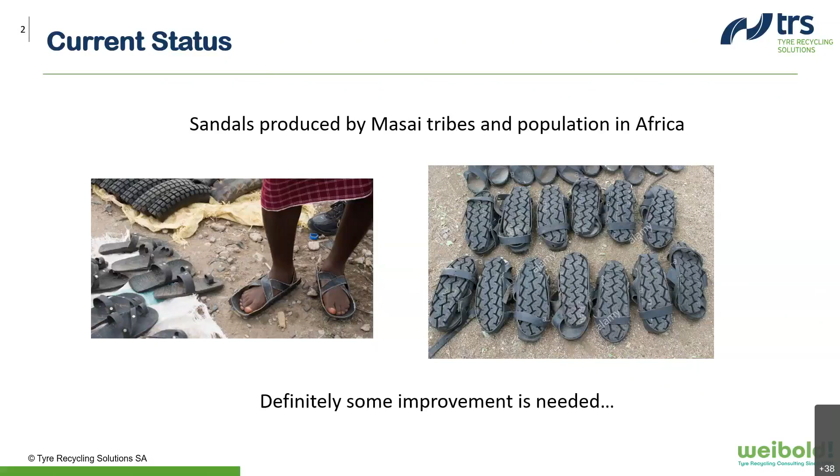It's somehow a provocation here. These are sandals that are produced by the Masai tribes and population in East Africa mainly. Somehow funny, but it's a good kickoff for this webinar, which is actually focused on how to evolve from this, with a presentation of processes and scale up and technology to go to an industrial scale. Next slide, number 3.

The main topics of the webinar. I will start from the tagline and be precise and accurate on this. We want to understand how to formulate our TyreXol CW rubber powder, maximizing its use, and make out of it sustainable shoe soles. CW stands for car water jet. We divided the presentation in three blocks of topics. The first block will be the introduction of TRS, the company and technology, and TyreXol rubber powder, the background for these trends and the rationale for using TyreXol in footwear.

The second block will be a bit more technical, involving the presentation of our results in rubber, in polyurethanes, and thermoplastics, with a case study on 3D printing. And the last block will cover cost aspects and EH&S aspects that are really important for the manufacturing of footwear.

With, at the end, our conclusions. To be said that a lot of work has been done at TRS, but also in other companies, on tires and how to recycle rubber powder on tires. But footwear is the second largest market for rubbers after tires. So we want to really incentivize the use of recycled rubber into the footwear segment.

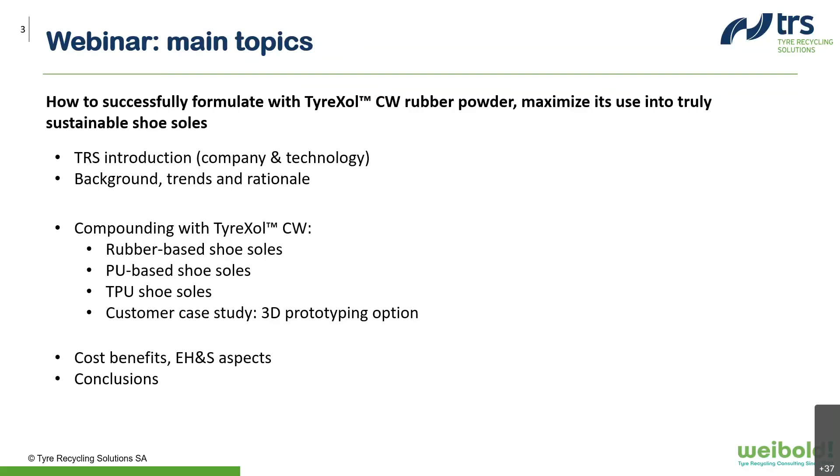Next slide, number 4. It's on the assets and the locations of TRS. From the pictures, well, our building, our plant with solar panels providing energy, brand new. A detail of the inside is part of our post-treatment plant after the water jet. The stock in and the stock out. Stock in are incoming end-of-life car tires mainly. Stock out are big bags of the powder we produce.

A remark on the logo. We are, since December last year, certified ISO 9001. It's a standard for the industry segment where TRS is planning to operate. Then the map showing Switzerland, where we are. The plant is located in the area of Neuchâtel Lake, while the R&D and administrative office are closer to Lausanne, on the Lake of Geneva, on Lake Leman.

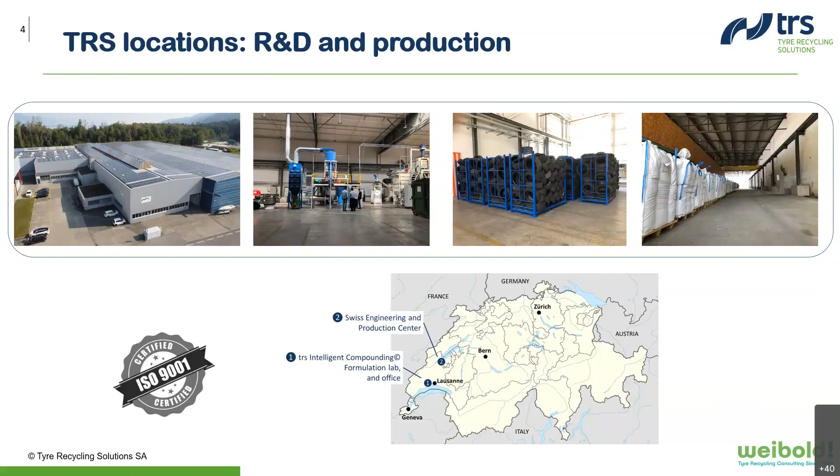Next slide, number 5. We present here the business model of TRS, which is key for this webinar and the evolution of the implementation of TyreXol into applications like footwear. First of all, the production, the assets. We have our own plants that we've been showing, plus the hubs. We have already a plant starting in China this year, and the next on-stream licensed plants will be in Eastern Europe and in the Middle East starting next year.

After that, the role of TRS, not just selling the equipment, but acting as licensor and interacting with off-takers. We have an off-take agreement with our partners. We take care of the production process that should be conforming to strict quality standards. The plan is to implement the ISO certification in all plants. And the idea is to go always in the direction of customers, meeting their requirements locally.

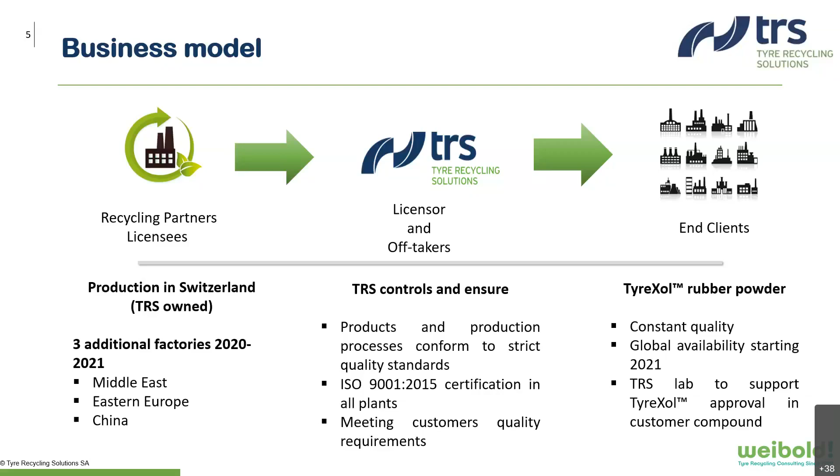The third step in the business model is the rubber powder itself. We aim to have a constant quality everywhere with a global availability provided by the geographical position of our plants starting next year. On top of this global reach, the centrality of the TRS lab and headquarters in terms of competences and technical support for the quality of the powder. Next slide, number 6.

A glance on the technologies. We start from scrap tires, mainly from car tires today. We start in the higher part of the screen with the sorting. This stream is for the TyreXol water jet. We call it water pulse. The sorting then foresees the introduction of end-of-life tires in the T-cut. The T-cut is our patented solution to make the tire into 3 flat parts.

The tread is treated with our patented water pulse technology, a specific water jet operating at above 2000 bars, which, after a process of dripping, drying, and sieving, generates a product that we call CW, car water jet, recently also accompanied by the TW, the truck water jet. We are starting to apply this technology also on truck tires.

But then the other stream on the bottom of the screen is concerning the qualities. Out of the fork at the T-cut, we can operate on the residual of the flattened tire that cannot be treated with water jet. We put it together with a mixed feed of other kinds of tires. We then implemented a solution, SGGM technology, shredding, granulation, grinding and micronization, which at the end of the process of sieving leads to a TyreXol quality mechanical mix that can be further treated with a chemical activation to create an MMA grade mechanical mix for asphalt and bitumen applications.

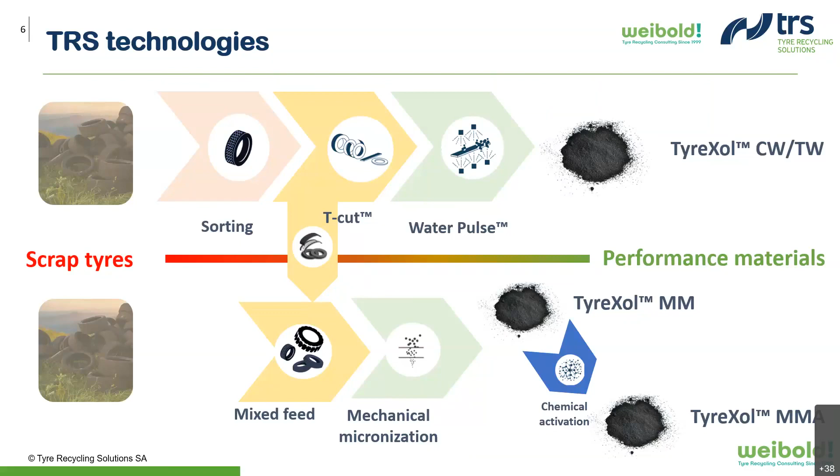On the next slide, here we present the lab capabilities, which are really a pillar of TRS strategy and the business model, supporting us in developing our so-called compounding intelligence of materials. We go downstream with solutions, also at compounding level. The lab is composed of a compounding part, including roll mills, a Banbury mixer, and specific rheometers and viscometers. We have then other rooms for the chemical and mechanical testing, with instruments to measure the tensile, the infrared and UV spectroscopy, the abrasion.

Plus, we have 2 other small parts in the lab. One is related to bitumen for the asphalt and bitumen solutions, and a microbiology laboratory, which is an R&D step that we are following for a biovulcanization of rubber. In the lab, we have 4 people. 2 are lab technicians. There is a PhD, a product specialist for compounding, and the head, our R&D manager.

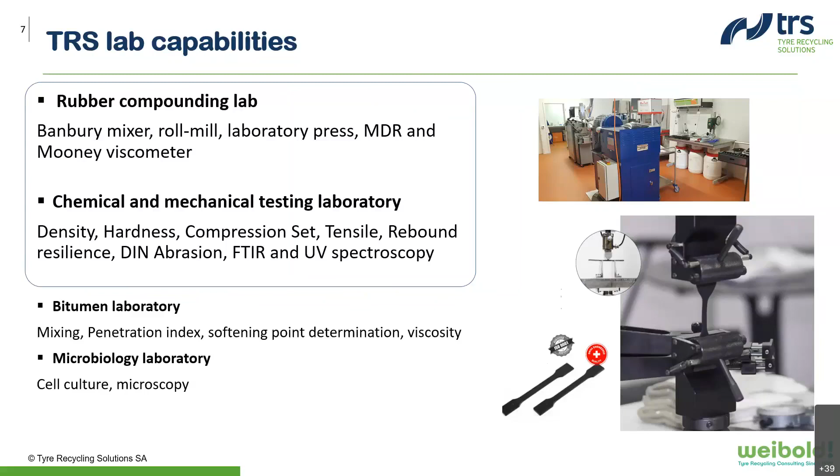The next slide is meant to explain the differences between TyreXol and the conventional rubber powders available on the market.

This morphology I will cover later, but first I want to focus a bit on the composition of TyreXol. This flake that we introduced before is a stable composition because it's coming only from car tread.

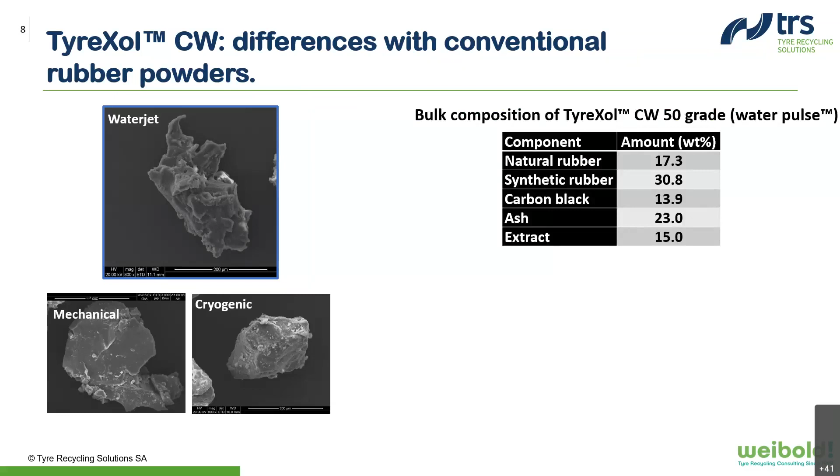That is, there is a high content of silica, and there is also, constant for all rubber, recycled rubbers from tires, the black color given by the carbon black, which is still there, giving a coloring effect.

Coming back to the morphology and the metrics on it, we measure it with gas adsorption, called BET, and we see that comparing TyreXol with cryogenic powder, there is double the surface available, and 50% more if you compare it with a mechanical powder.

This measurement is confirmed by the related chemical activity measurement with iodine, and it's actually measuring the real potential for bonding.

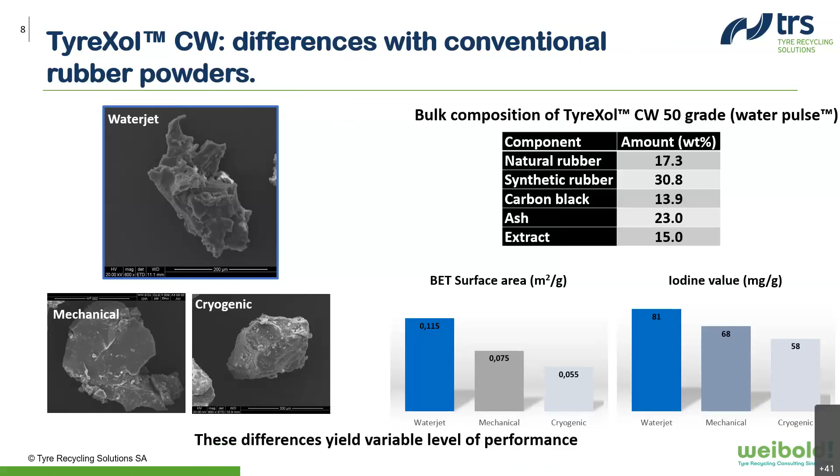And what are these differences doing? Well, we will demonstrate that these differences are yielding and creating different levels of performance in compounds. Next slide, number 9.

Again, on the composition, we measure it at different times over time, and we see that it's really, really constant.

Considering that the product is chemically active and with a constant composition, the claim, the idea we have, the practical aspect, is that we want to propose it as a formulated raw material to be formulated, and not just as a filler for any matrix.

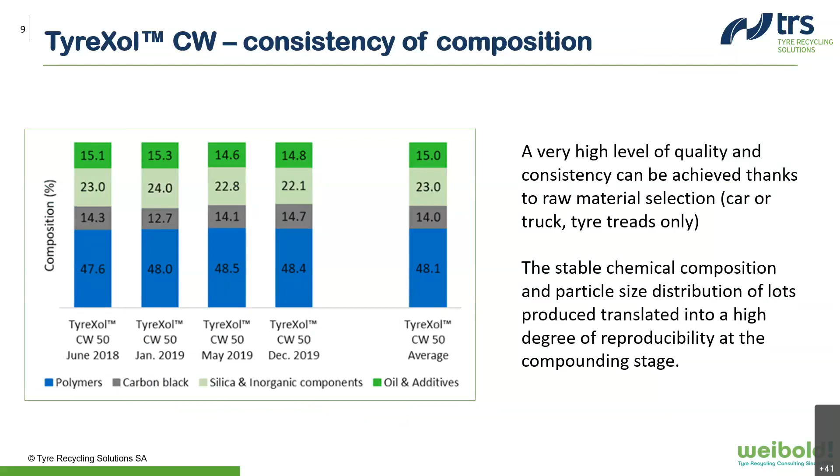After this particular focus on the peculiarity and composition, next slide, number 10, covers the sustainability of this powder, specifically also for the footwear segment.

The source for the car tread part, the powder from car treads, is an unlimited source. Every year there are more than 1.5 billion end-of-life tires available. What you can see from the picture apparently is a landfill — it seems an ecological disaster — but we want to see it rather as an opportunity, as raw material.

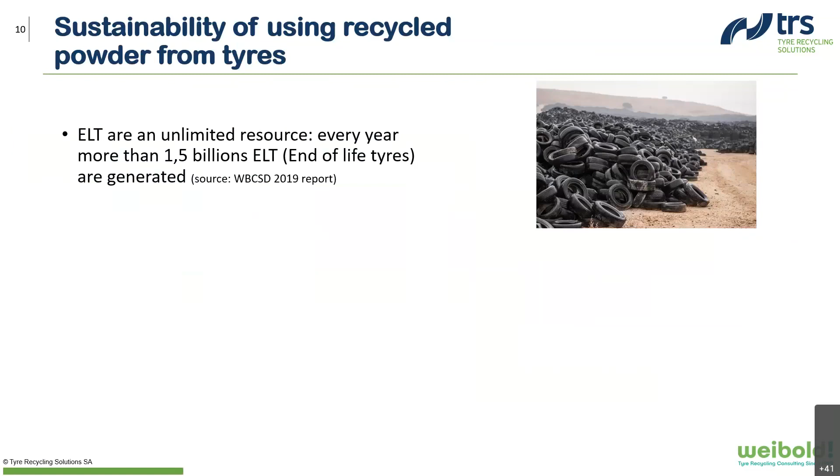Coming to the sustainability aspect, not from the raw material side but from the carbon footprint side, we went and looked into literature at what are the levels of carbon footprint in normal virgin, neat raw materials, and what is the impact in CO2 emissions of recycled rubbers, including TyreXol.

It's evident that the impact in terms of carbon footprint of recycled rubber is much lower, less than 1,000 kilograms of CO2 per ton, versus above 3,000 kilograms per ton for the virgin raw materials.

It's an average. So even in the most CO2-containing case, the use of rubber powder, TyreXol, and its substitution in polymers for footwear, is an advantage in terms of carbon footprint. Going to the next slide.

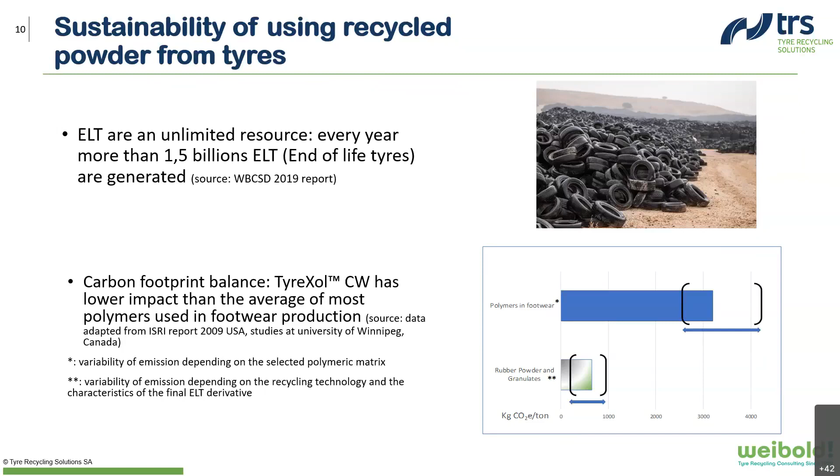What are then the industry trends and requirements, the rationale for our activity? First of all, the 3 megatrends: the effect of the presence of Greta in the media, which generated strong awareness of the impact of the anthropic effect, and started to create a focus on a circular economy in place of a linear economy.

The most recent effects of the pandemic, that experts say are polluting the environment and creating issues and potential contamination, cross-contamination, plus the effect of deglobalization — that is, a stretch toward the reshoring of industrial activities. There's a strong focus on using local districts, local resources.

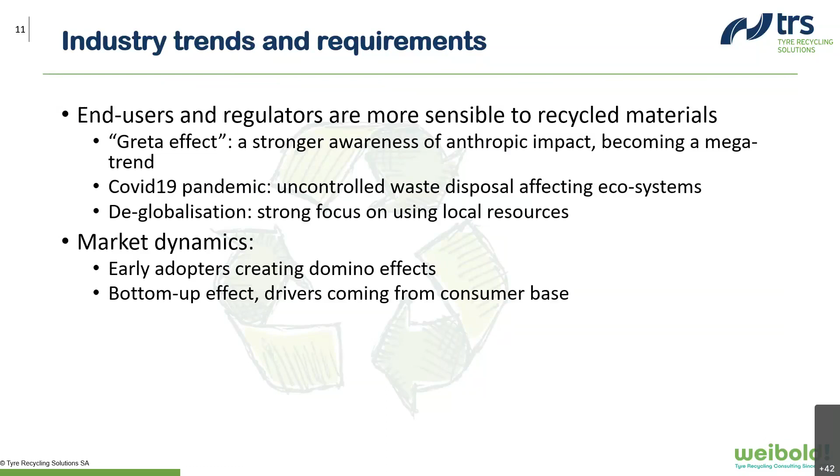Then what is supporting its use in footwear and in the market, from the market point of view? A Me Too effect: the early adopters are generating a domino effect, so once someone shows it can be done successfully, everybody wants to follow. And then a bottom-up effect of end users, who through a B2C approach influence and leverage B2B; also in footwear manufacturing there is a need for something sustainable coming from the basis of consumers.

More specifically to the requirements in footwear, there is now higher attention to specifications that should be functional, not just dictated by historical data sheets and specifications of producers of natural or synthetic rubbers, plus higher flexibility to compromise requirements in terms of mechanical properties and also color. Now fashion wants white, clear color shoes, but if you use recycled material, dark or black color prevails. This is acceptable, it's starting to be acceptable, it's a compromise, and it's accepted.

There are already plenty of companies working to produce sustainable footwear. Brands like Indosole, On Running, Adidas, Everlane work a lot in this direction. But it's also true that they focus a lot on the shoe uppers and not on the shoe sole, which has a different level of recyclability.

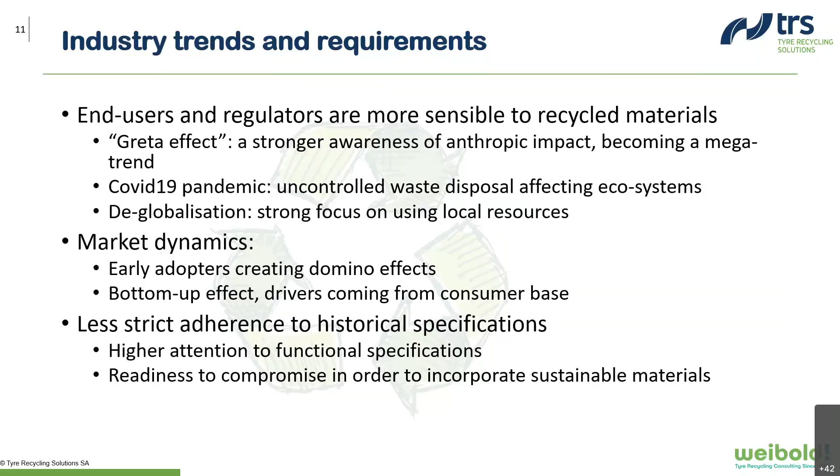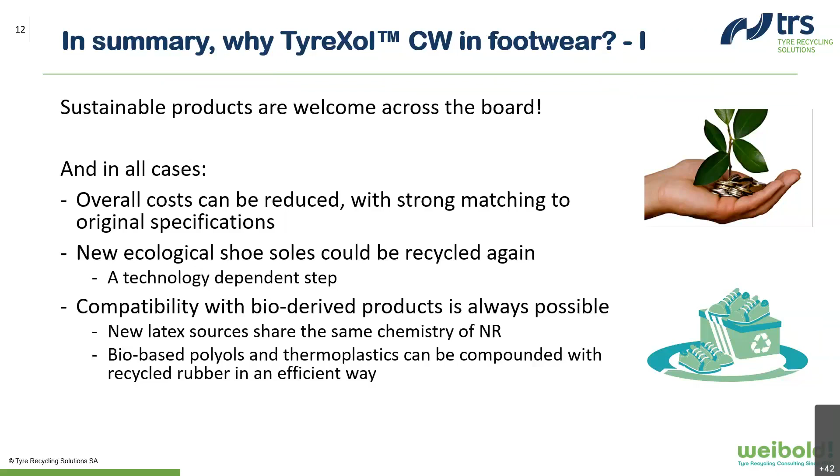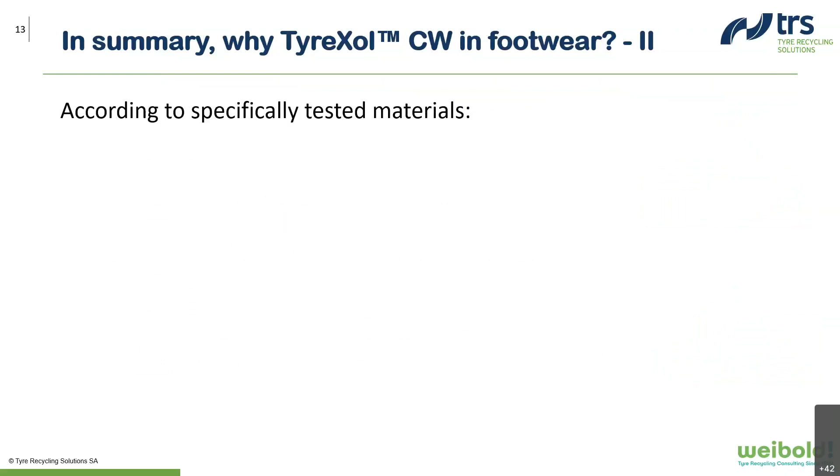Next slide is number 13. Going into details for the polymers used in footwear and how TyreXol CW fits in.

First of all, in rubbers there is already use of internal scrap recycling. Most of the time it's reclaimed scrap, or less frequently grinded, but it's used by itself. It's not making a shoe sole sustainable.

Other aspect is that these reclaimed products, this internal loop, is not unlimited. The reclaim is not 100% of the raw material, and the target in a company should be to have zero scrap.

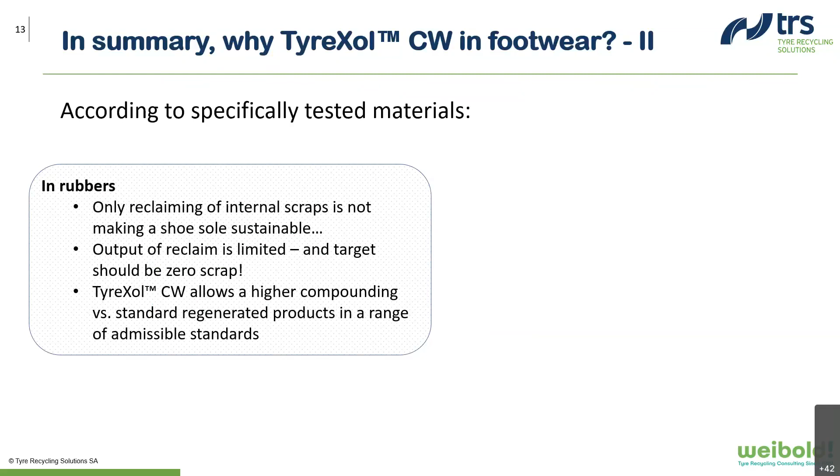What is then the importance of TyreXol? It allows a higher compounding level on top of the internal reclaim, higher compounding level versus the standard regenerated products, within the specification or requirement of the shoe sole.

Going to polyurethanes that we tested already, we have seen that there are synergies possible in a polyurethane matrix with TyreXol, and it's in line with ongoing efforts for recycling polyurethane in the physical mechanical way, not the chemical way.

Coming to TPE and specifically TPU, we've been working on synergies in compression set and adherence. These are also aspects possible in TPEs, but not marginal is the aspect that thermoplastic is the recyclable product of excellence. Having said this, advantages are possible in any family of polymers used in footwear with TyreXol, for a company using TyreXol.

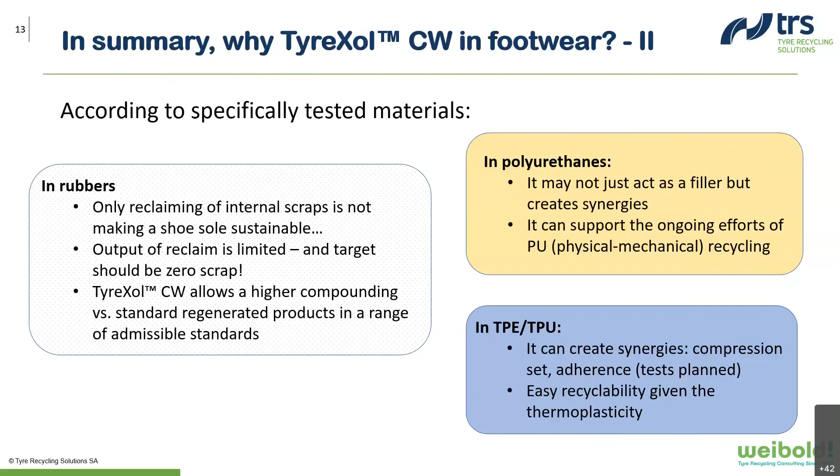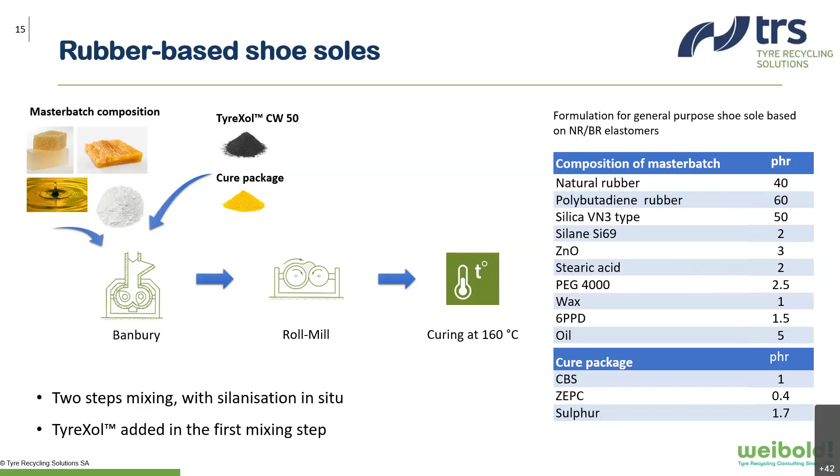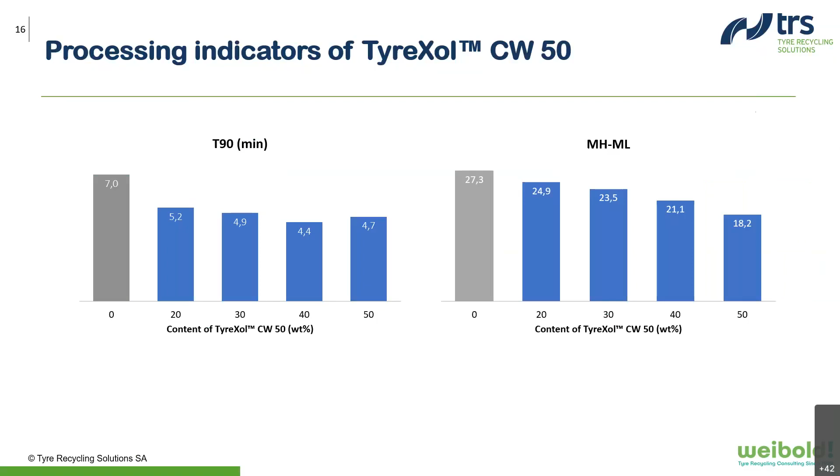Then measuring the MH minus ML, so the maximum and minimum torque difference - it's a proxy of the degree of cross-linking. We see that it's slowly degrading at higher loadings. We have to say that these are all composition-dependent solutions, and an adaptation and fine-tuning is always possible.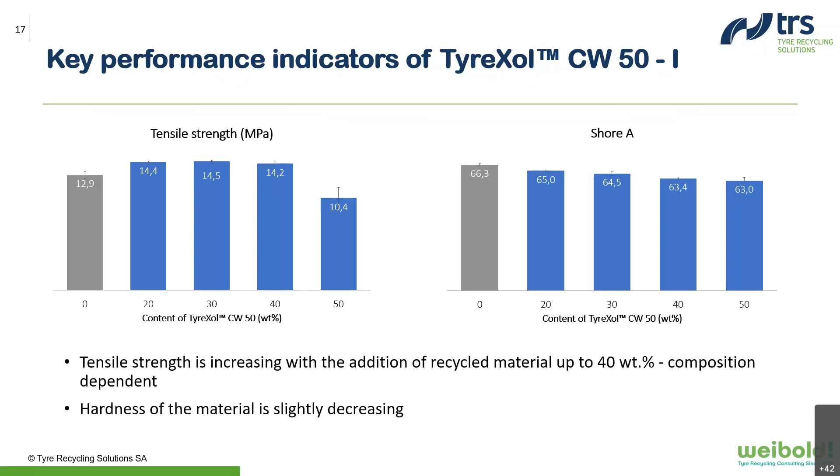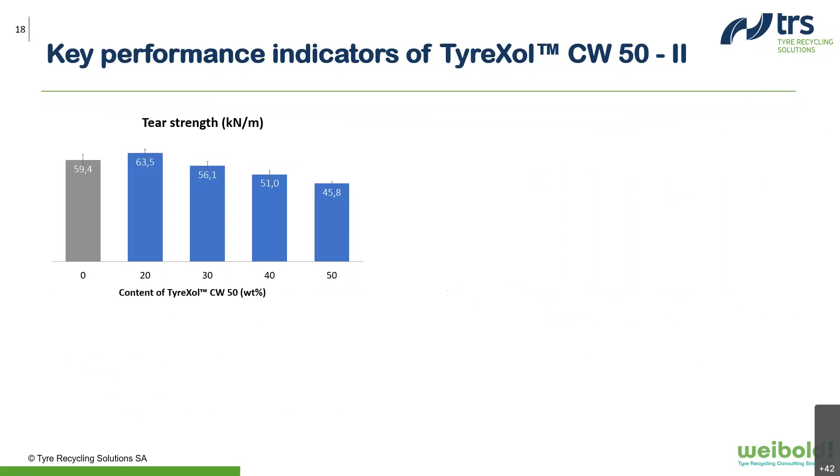So definitely we have a positive effect of TyreXol. Then going to analyze other aspects in slide number 18, what's happening to the tear strength? Tear strength is slightly decreasing, but still in range for loadings between 20 and 40%. It's measured in kilonewton per meter on the y-axis.

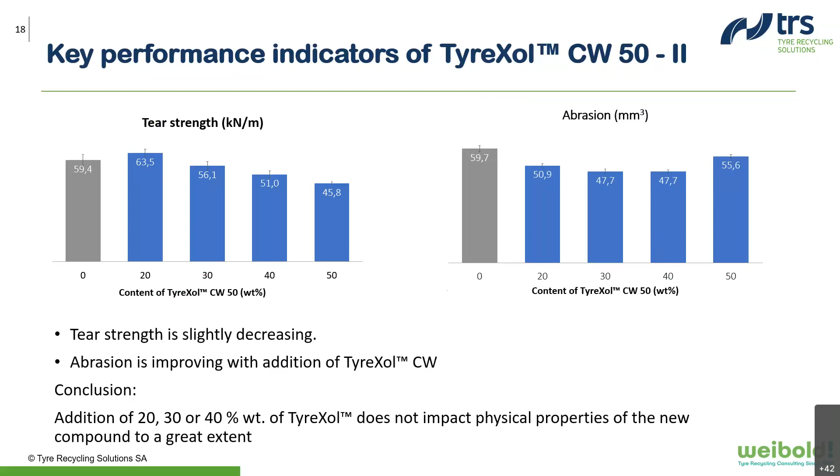Then we analyzed what's happening in a common case of a shoe sole producer already using internal reclaim and focusing a lot on them. So we kept the same formulation, we added the one ingredient, with the idea really to understand if any synergy is possible, and if this paradigm of only internal scrap is good. So we kept a 30% loading in the formulation.

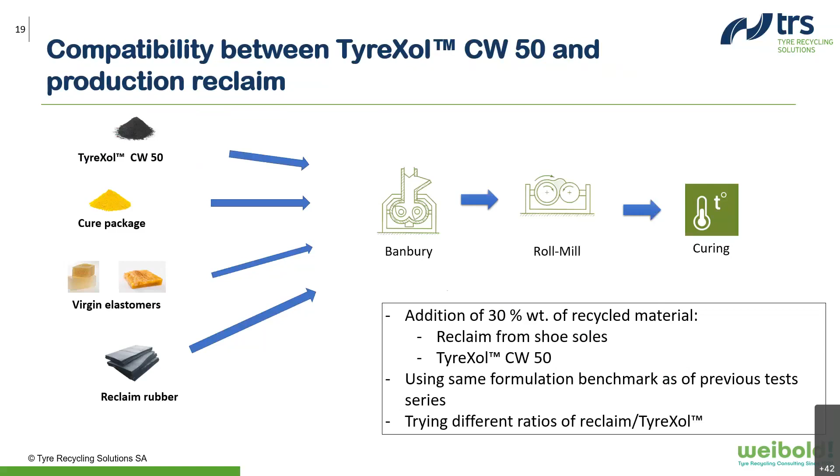We have seen that it's good, and then we made vary the TyreXol and reclaimed rubber from footwear into this range of maximum 30%, trying the full range from 0% TyreXol, 100% TyreXol, 0% reclaim, 100% reclaim. So within these ratios, we have then gone to next slide 20, measuring what's happening with 30% of recycled material in a footwear.

Again, the plots are similar with the tensile strength in megapascals on the y-axis. The tensile strength is improving once you start using TyreXol. And measuring also the abrasion, the important parameter, you can see that the abrasion is decreasing. So the effect of TyreXol in the mix is definitely positive.

As for synergy, there is good evidence that it is possible, and TyreXol is just increasing the possibility of using recycled material into footwear, and at the end of the day, maximizing the total content of recycled material into shoe sole.

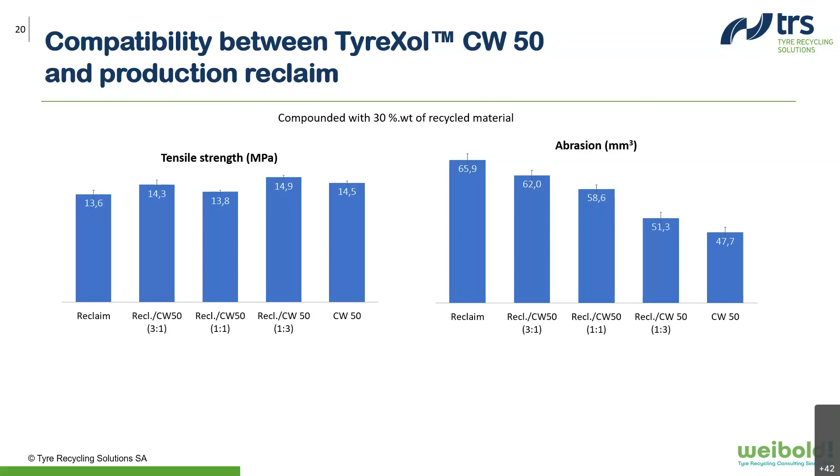Next slide. The question we ask is, what's happening if we compare rubber by rubber type? And, sorry, it was a bit slower. So we made a sort of one-to-one comparison of 100% regenerated material.

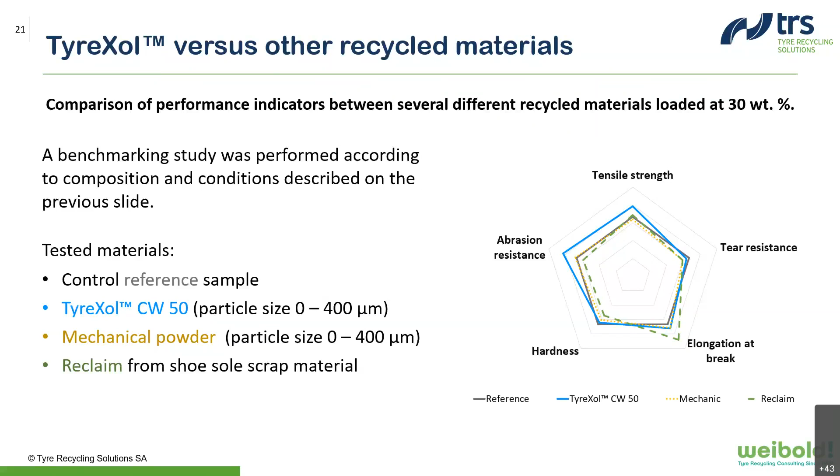Now, next slide, we will move into the polyurethane compounding. It was a sort of challenge. The point here is how to mix liquid resins and solids. It's possible, it just requires suitable equipment to do it. The ideal technology involves equipment suited for the mixing of solids.

There are producers in the market, like Gusbi, Desma, Niagara, that are proposing this equipment for cork, synthetic cork, cork imitation footwear. And as a secondary option, less appealing and not the first choice, is a dispersion or suspension of TyreXol rubber powder into the polyol.

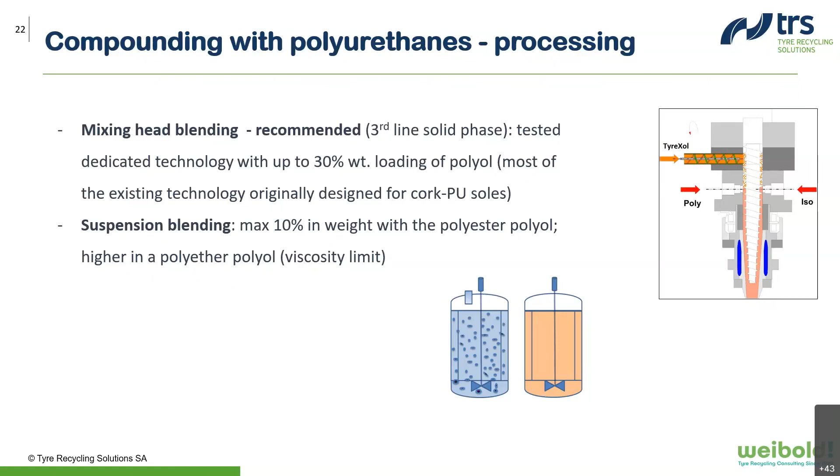We made a test then, and we designed the experiment using always the CW50, the 50 mesh grade. We used the mechanical powder and the cryogenic powder as benchmark. The choice for the polyol, or the PU basis, was a polyether, and we decided to use a vacuum mixer to better simulate the operations in production equipment. After that, we went to characterize the different plates that we obtained.

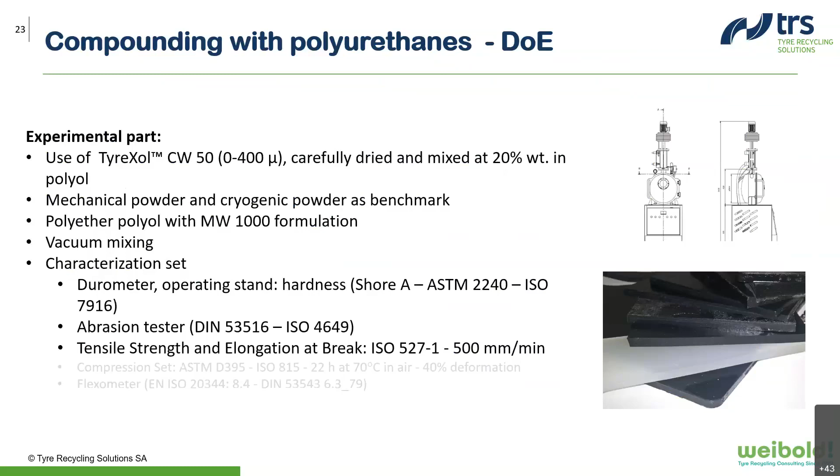Next slide, number 23. What was the approach? Well, we started with a drop-in test. We made no check of the ratio or the stoichiometry for polyurethanes, and we decided to approach mixing TyreXol in the polyurethane, in this case at 20%, and see what happened.

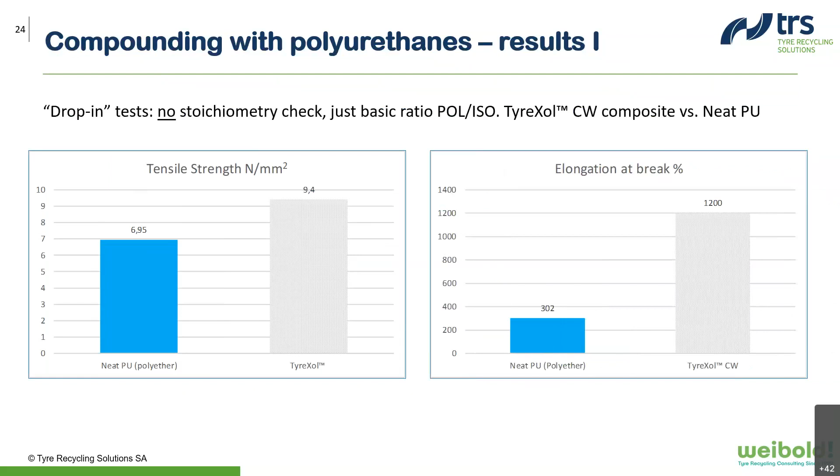We could notice that the compound with TyreXol was performing better than a neat polyurethane. This is somehow unexpected. But then checking the elongation at break, we noticed that with TyreXol in the compound, it was really high, and that was even more unexpected.

First of all, the assumption is that probably the tech data sheet ratio was not respected, and the stoichiometry had to be respected at this point. But the fact that the elongation at break was so high was for us a demonstration that there is high interaction in the polyurethane matrix.

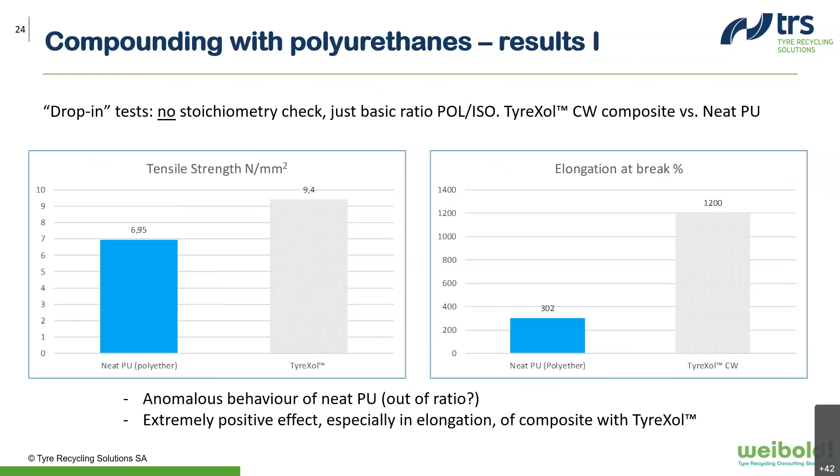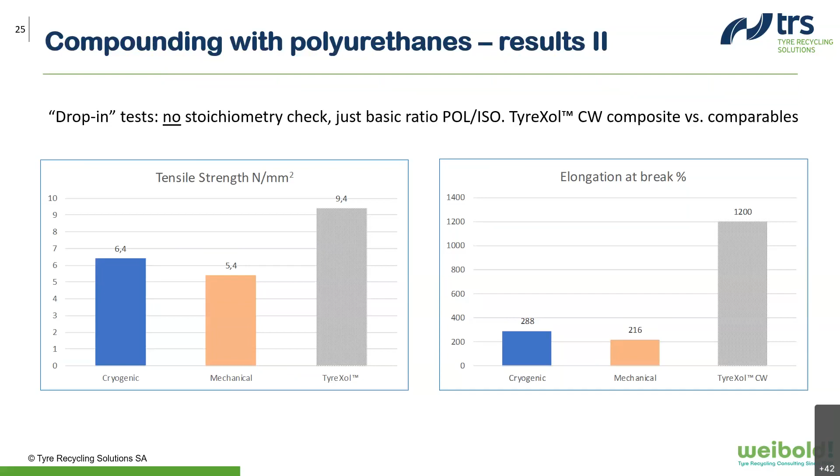Then, continuing the same approach, we measured what's happening in this drop-in approach with other rubber powders. We measured the tensile strength and the elongation, and we have seen that other rubber powders, both the cryogenic and the mechanical powders, are behaving rather without interaction in the matrix, as it was seen for TyreXol, and probably without any bonding. So more with a filler effect rather than a composite effect that one could assume for TyreXol and polyurethane.

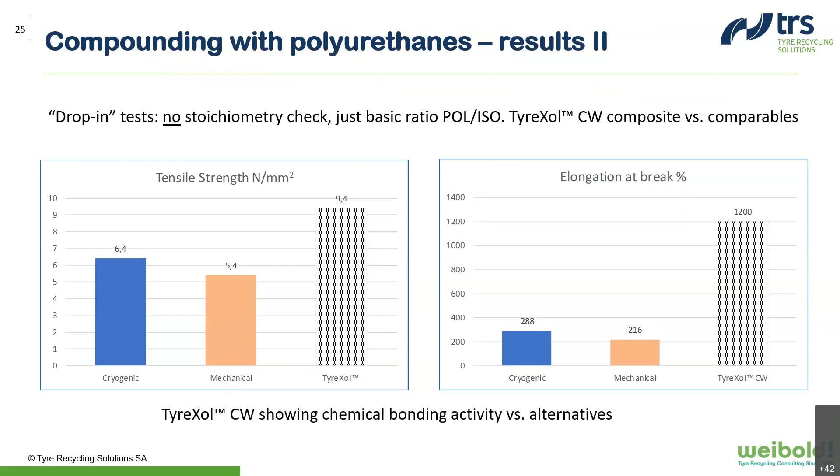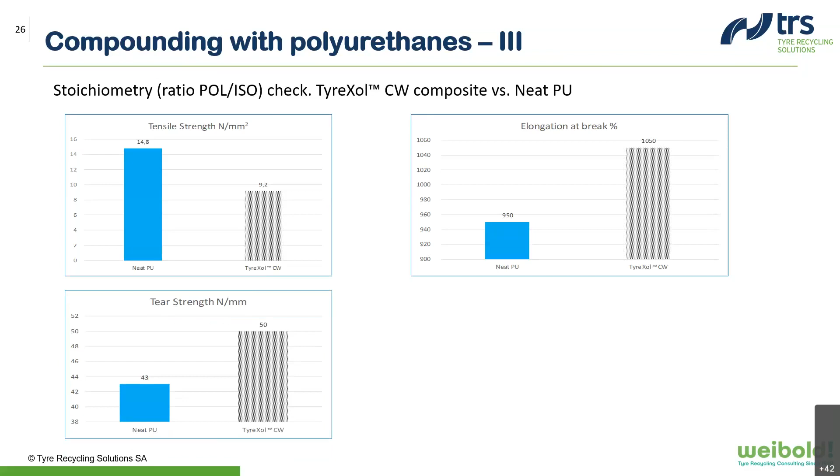Then the point was, let's close the loop on this kind of blind experiment and work within stoichiometry. So once we measure the tensile strength with the adapted stoichiometry, with the right ratio, we see that the tensile strength of polyurethane is back to the expected behavior. But the elongation at break is still better when you have TyreXol in the compound. And what is then happening to other properties? We see that also the tear strength, once you have TyreXol in the compound, is improving.

So the conclusion in this case is for us that there is a possibility to match the performance of polyurethane, but a reformulation of the PU mix is needed. And what we tested is actually the first step in polyurethanes.

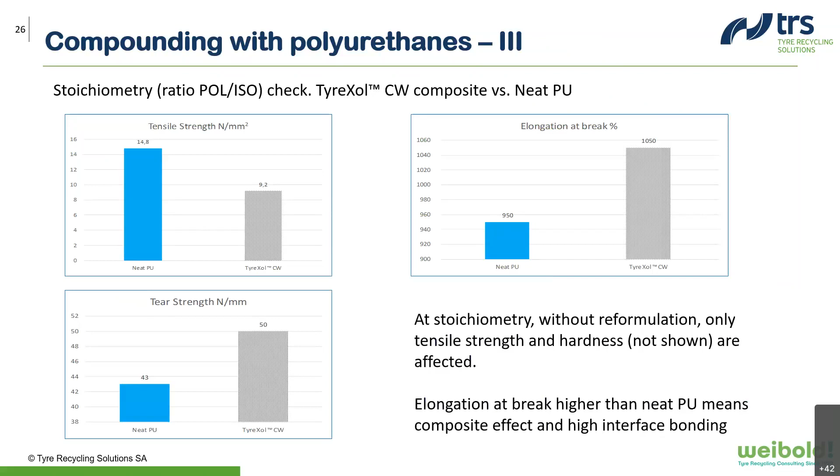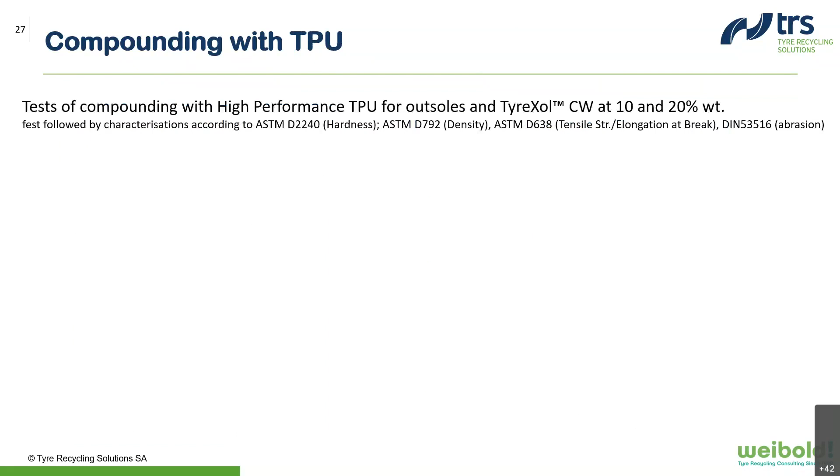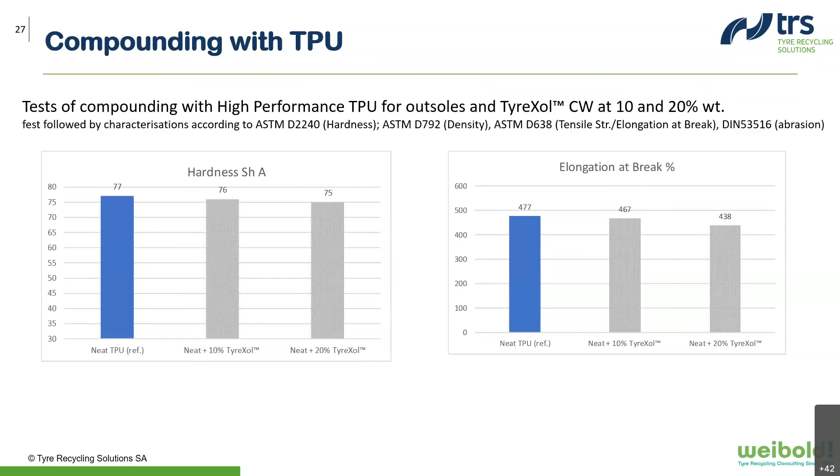Next slide, slide 27, we have here what's happening once we compound with TPU in a thermoplastic. We made this test with a third party, and we tested 10 and 20% loading. A really good aspect is that the hardness is not changing that much, and also the elongation at break is still very good at 20% loading of this neat TPU. It's a TPU that is specifically tailor-made for shoe soles, for footwear. But we had to notice that the tensile strength and the abrasion present a change versus the neat above 20%.

Clearly, the two solid phases in the composite can be working together, but other changes are needed. Either it's possible to work on the TPU formulation itself, or, still aiming to obtain other properties, improving properties like the compression set or the grip on wet ground, one should adapt to work in a compromise compounding of 15% in order to be in a reasonable range of tensile and abrasion.

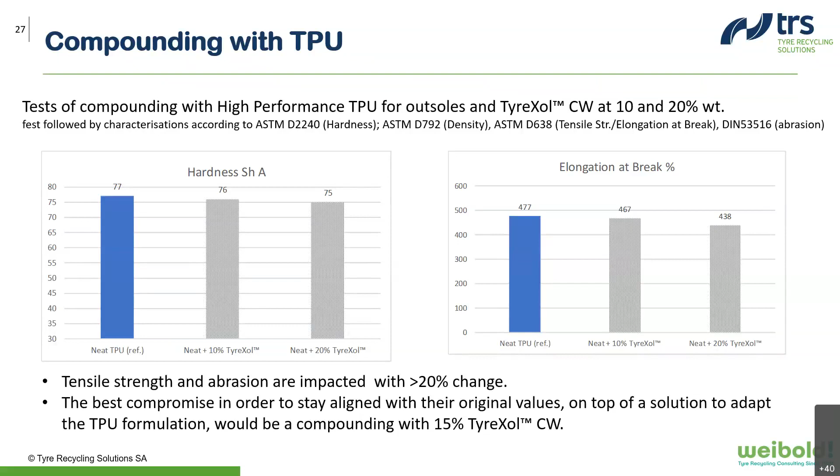Then, after this test, I would like to introduce you to a video that is representing our efforts in the formulation of TyreXol in 3D filaments for 3D prototyping. 3D prototyping in our discussion today is meant really to create a simulation of the touch, of the shape, not really of performance, because 3D printed articles are not comparable to injection molded articles.

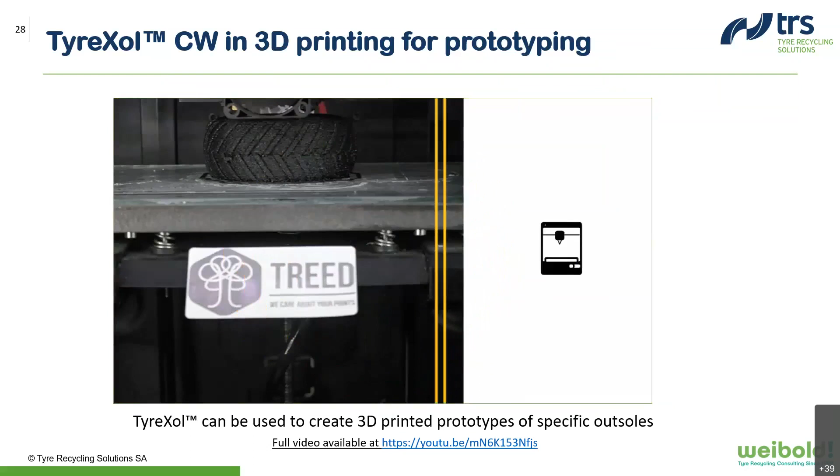So hope you liked it. Then a few slides covering the economic aspects of TyreXol in compounding. It's not a marginal aspect, but it's required to confirm the value proposition: once we have seen that the carbon footprint is okay and the performance is okay, it's important to assess also what's happening with the financials.

Covering the rubber aspects and considering a price assumption for TyreXol of less than €1 per kilogram, we can see that if you have a 1.5 kiloton plant or even a 4 kiloton per year plant, if you can formulate TyreXol in a proper formulation at 40%, for instance, you can achieve up to €1 million savings, and 400,000 in the same case if you have a smaller plant or a smaller capability to absorb TyreXol in your formulations.

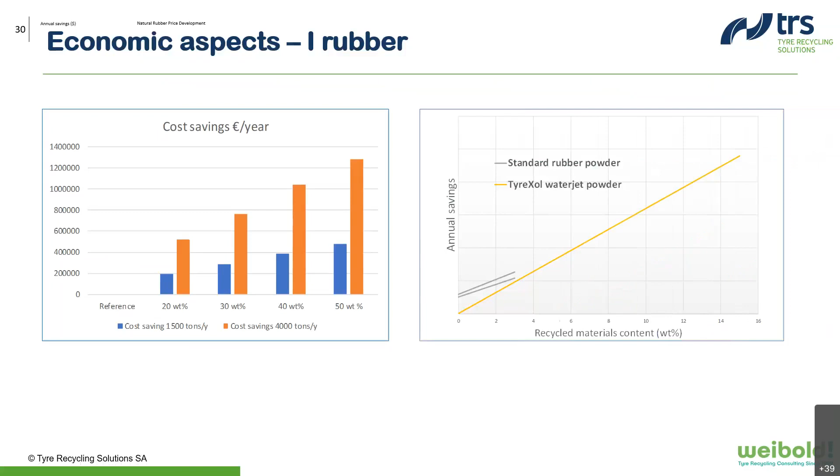Then, taking an example coming from tires, the tire business say they want to use internal scrap, and there is nearly no cost for internal scrap or reuse. It's very cheap, but then the limit is that they cannot go beyond 3%. While with TyreXol, you can go really high, even in tires, with respect to the conventional recycling ratios.

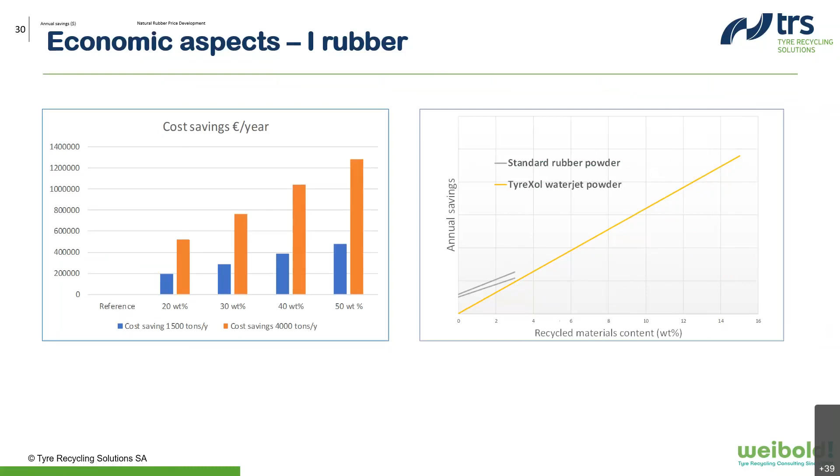So the key message here is that the price per kilogram is misleading, is a trap. The savings in a formulation, in a compound, are happening only once you can really formulate with high quantities of recycled material.

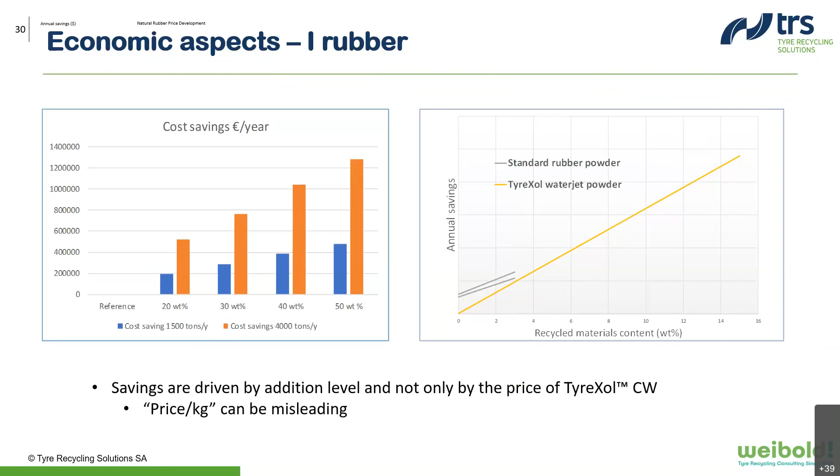And only there you can make savings, still keeping the performance, of course. Doing the same assumption, keeping the same approach for polyurethanes and TPUs that we have seen, considering a 30% loading in polyurethanes and 15% in the TPU case, and using historical prices for those two polymers, we can see that savings are possible up to 18% in a polyurethane and 13% in a TPU.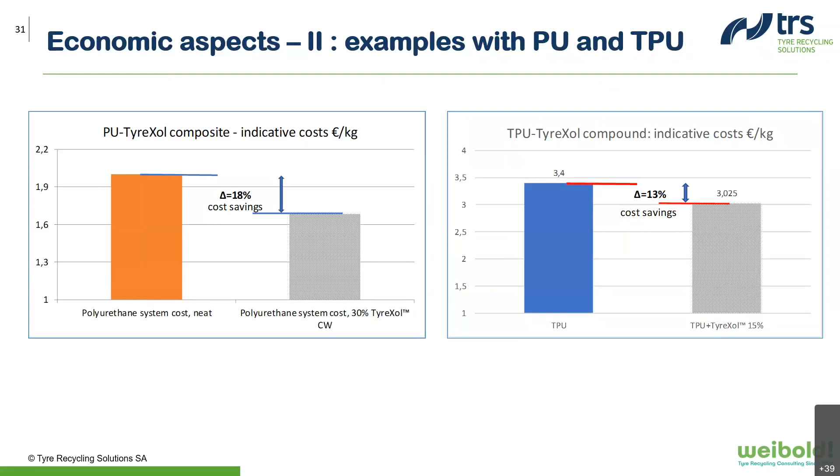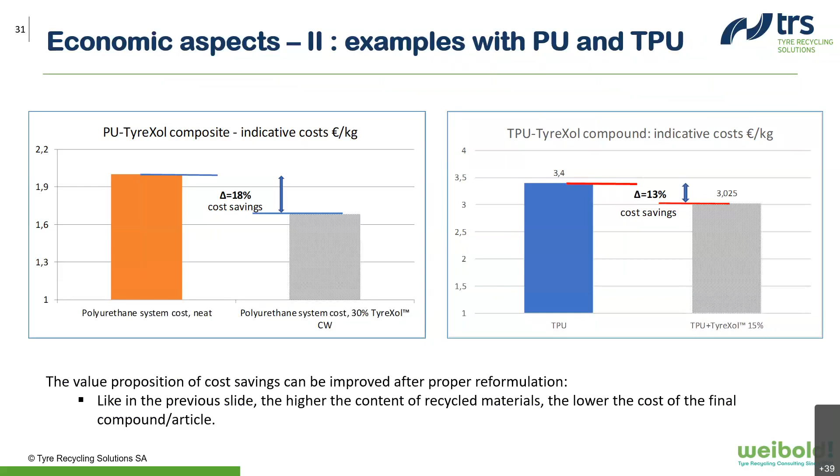The message is the same as the previous slide. The more you add, always having a cheaper price than the virgin material, the more you save in the final cost structure of the shoe sole.

A couple of slides now on aspects that are also important for shoe sole producers: EHS, so environmental health and safety. These aspects come out especially when material coming from another industry like tires is compounded with products conceived and designed for footwear.

In this table, we compared the measured values of polyaromatic hydrocarbons found in TyreXol with the limit given by REACH and the limit given by GS, the Geprüfte Sicherheit standard, considering a dilution of 20%. And we could see that in this case, given the dilution, but also the already low content of polyaromatic hydrocarbons in the tread formulation, the two standards are met.

You can see that this formulation also came out of different tests. So the stability of the composition of TyreXol is confirmed also for the undesired impurities over time and at ppm level. So this is in compliance.

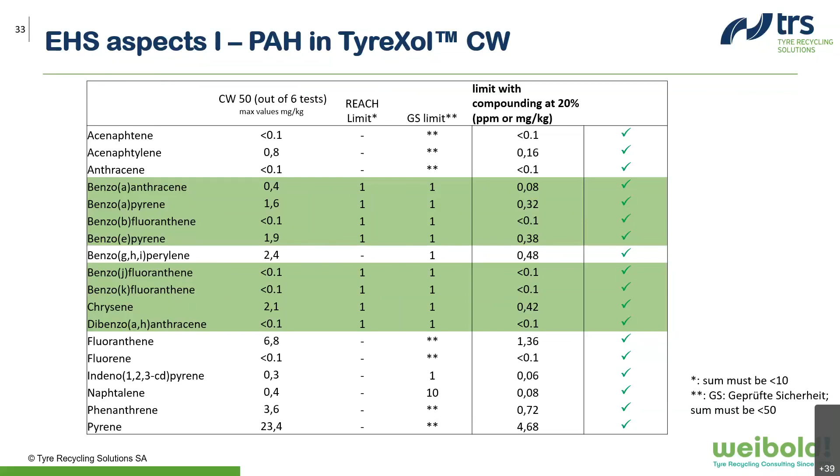Another aspect of compliance is the environment, Annex 14, what's happening for the SVHC, the substances of very high concern. Again, there are four groups: polyaromatics, metals, phthalates, and phenols. There is no requirement for authorization. All values are within the limits, so with the previous slide and this slide, we could say TyreXol is okay in terms of EHS for reformulation in footwear.

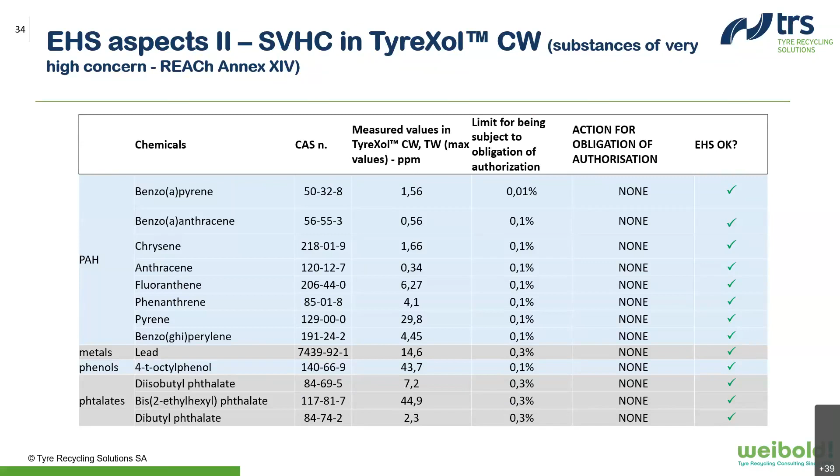This slide number 35 shows where we are now in terms of presence in the market. You see the flags. We have sales and advanced projects in the districts of footwear production: Spain, Italy, Vietnam, and China. Unfortunately, we cannot give details on the projects. There is high IP and confidentiality requested by producers, so no pictures, no details. But definitely, TRS is having a good reach at global level also for footwear.

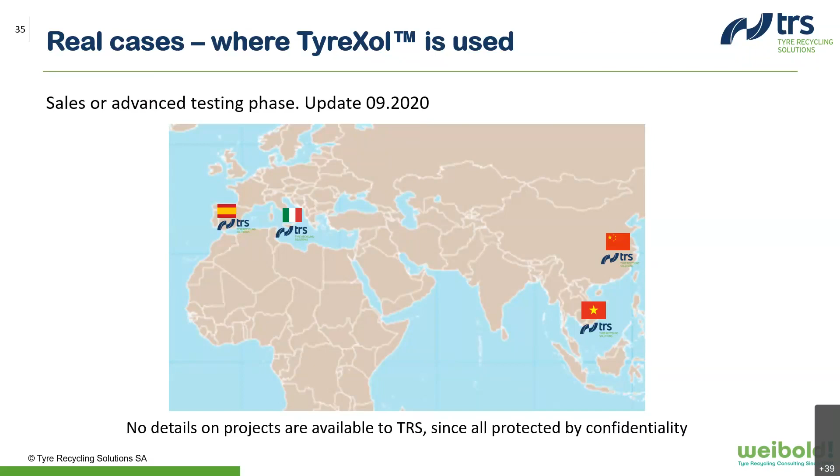Last slide is our conclusions and the perspective. So we demonstrated that high savings are possible. There is no loss in performance with the tailor-made formulation that we used, and there is a strong carbon footprint reduction.

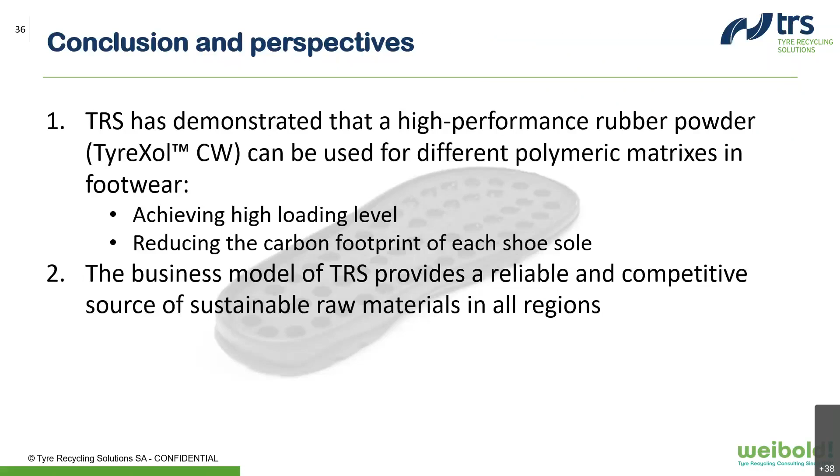But on top of this, in terms of perspective, this is achievable at global level with the business model of TRS. We are proud to propose something that can be used in all parts of the world, confirming the vision we have: to reinvent tire recycling and transform waste tires into a valuable resource. So that's it.